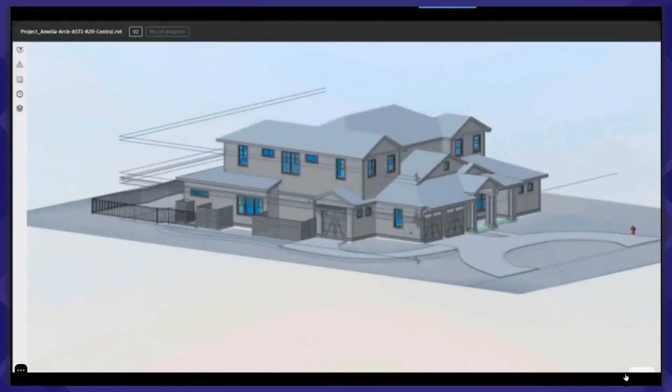So let me go ahead and play this recording. This is Project Amelia, a home in Florida where the homeowner wanted to use a robotic total station to verify layout. The entire home was generated inside of Revit.

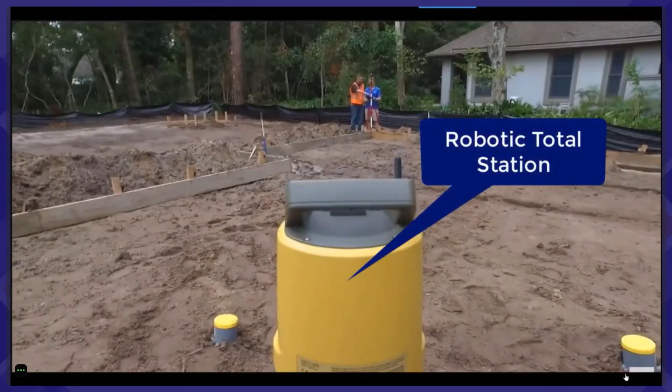And then using the robotic total station, we were able to locate all the underground utilities. It was a good thing we did that, because there were a couple places where the pipe stub-ups and the floor-mounted electrical boxes were not in the correct location. Using the robot, we were able to quickly find those locations.

Now I'm going to jump right back into the video and proceed to here and just stop for a second. So this is the robot. What you see is I'm back here holding an iPad, and that iPad is communicating with the robot. This robot is actually telling us where to stand.

By looking at the iPad, we can walk around to wherever a pipe stub-up might be, or an electrical box. So we're not telling the robot where we want to be, it's telling us where we need to be based on the model that we're using.

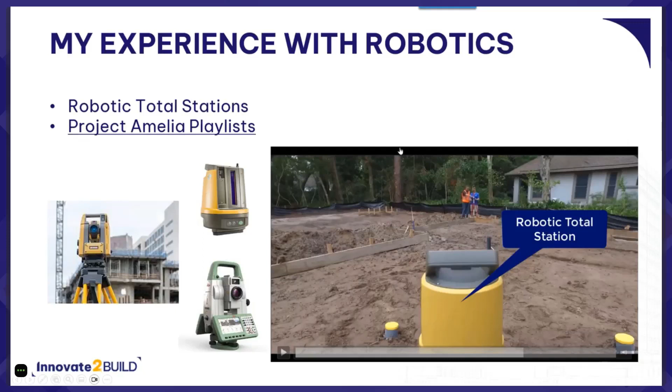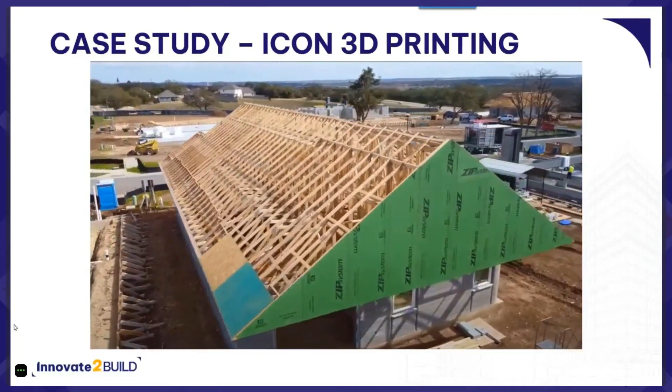Here, it's actually constructing these buildings out of concrete. And once the walls are created, then framers will come in to go ahead and create the roof, install the roof trusses. But here's an example of the actual printer.

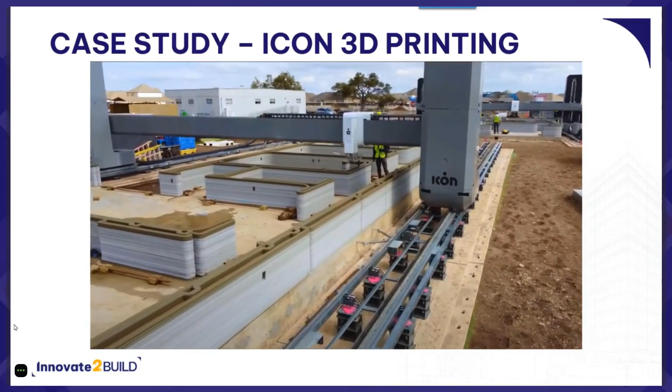And it is going through and actually placing concrete down on top of itself over and over again, and these will actually be the physical walls for this particular building. So those of you that work with concrete a lot, a lot of this can be done differently - we can put rebar in there as well.

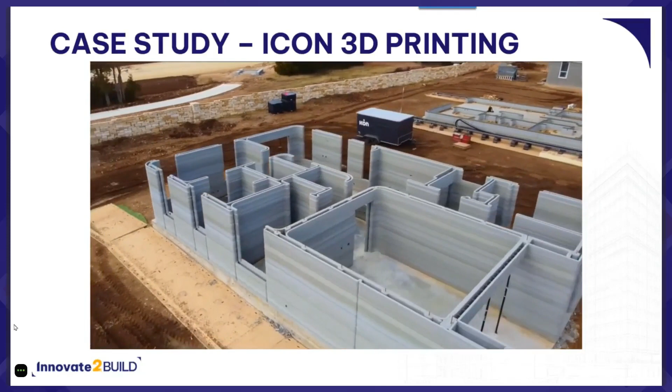But what you're looking at is a 3D printed floor plan taken directly from a three-dimensional BIM file or Revit model, and then from there it's converted into a 3D house.

So first, what is the definition of augmented reality? It's a technology that overlays digital information, such as images, videos, or 3D models, onto the real world, enhancing the user's perception of their environment.

Number two, some advantages with it is spatial awareness. AR devices are spatially aware. They know where they are in a building, and this allows users to interact with and manipulate virtual objects in the context of the physical world. The AR goggles today can sense if there are specific objects around it and then have the ability to overlay the digital with the real without any need of any sort of targets to do that.

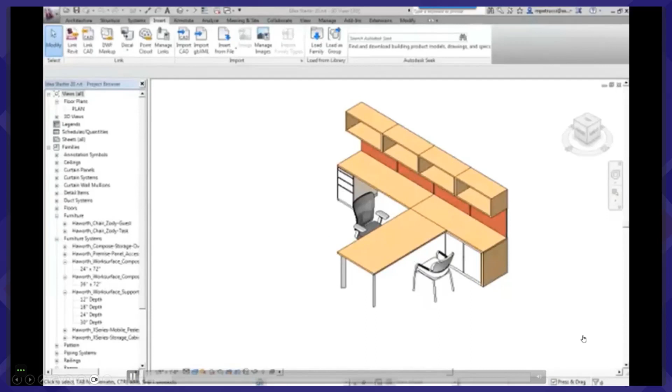I got a video here that's going to show you my first experience with AR. If I remember correctly, this was back in 2012, and this is up on my YouTube channel. In here, I just quickly put in some equipment in a Revit model, and then I pushed the equipment over into a product that Autodesk used to have called Showcase. With Showcase, I put a sheet of paper underneath the furniture, the same paper that you're going to see sitting on my desk in a minute. There's my hand, actually. And this is my very first attempt with AR. And so there's the paper.

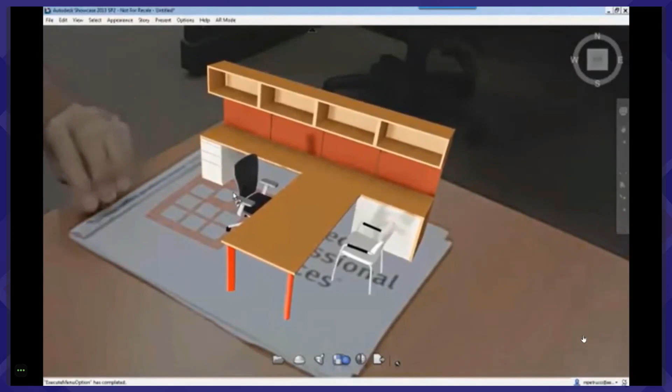Now notice as I move that paper around, I can actually see that model. Now with my naked eyes, I can't see the model. I have to look through it. I have to use a lens. In this case, I was using a webcam, but I could have used an iPad or a set of goggles if they were available back then to view that three-dimensional object. That is augmented reality. I was displaying that furniture on my desk. In a real environment, it'd be much bigger and I would display it on a floor so I could see how things look. But that's an example of AR, digital plus the real world.

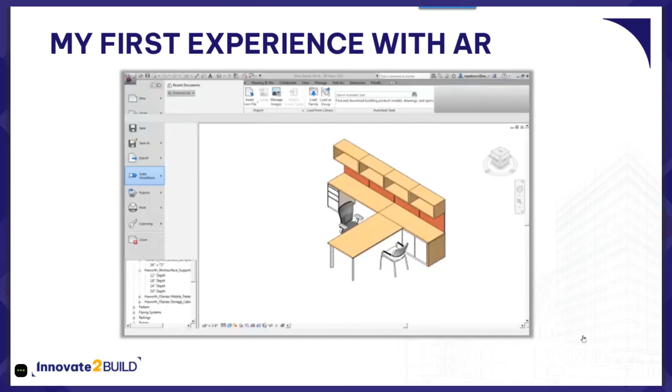You actually can do AR today. You can do it right after this call. Now we can use iPads and iPhones, and we can display 3D models. Like in this example, you can see a model displaying on the desk. Now you need a model to do that, but you have the ability today. If you happen to download the Amazon app, and many other furniture and appliance companies are doing this, they have the ability that when you look at their furniture online, you have the option to display it in your room. You press a button and hold your camera up. This camera will actually show your physical room, and then you can see what that piece of furniture looks like in your room. So you can actually do that today.

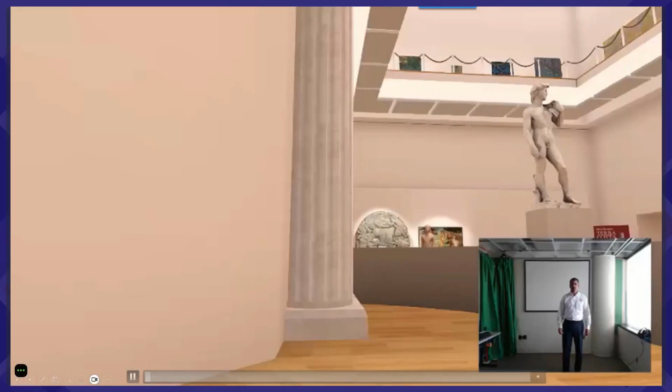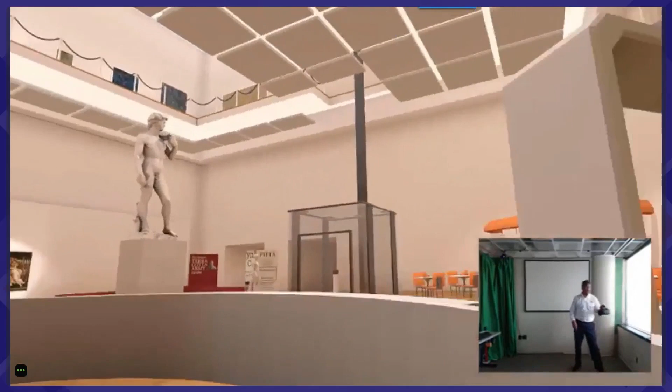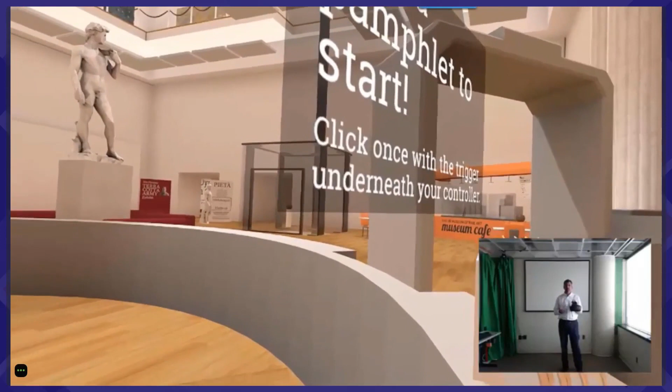I'm actually in a room that we used a lot to simulate AR and VR, and you'll see the green screens in the back. I'm pointing to the upper corners where those little boxes are. Notice when I pick up the headset, how the screen shows what I see when I put it on. As it's shaking in my hand, you can see the screen is also shaking.

As I put it down, I'm going to pick up a device I hold in my hand, and that gives me the ability to walk through the building. I can pick up any item, and I also have the ability to jump to other parts of the building.

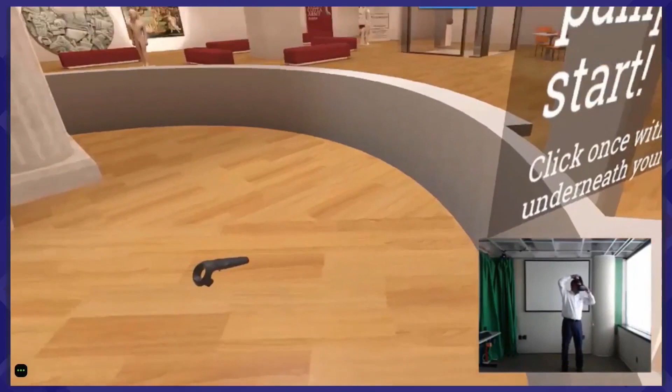So here I am putting on the headset, and obviously this building is much bigger than the room I'm in. At some point you'll see me jumping—you'll see a little light on the ground, and I'm controlling where I could jump to within this particular building.

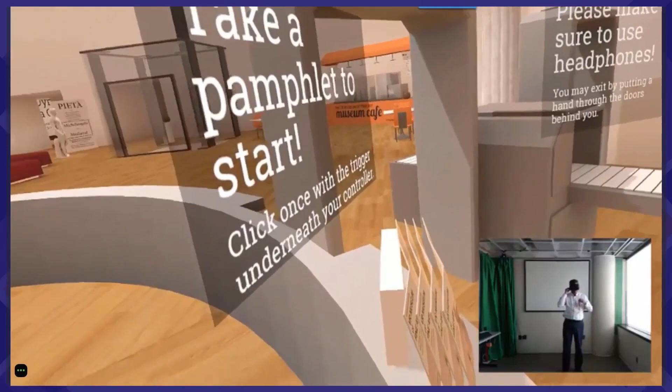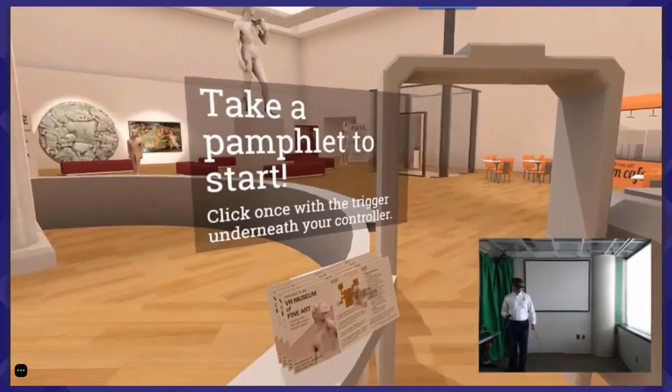So I'll go over and pick up my handset. Now I'll walk around and I'll see there's a little pamphlet here. Using my headset or my hand, I pick up that item, go ahead and read it, and then put it back.

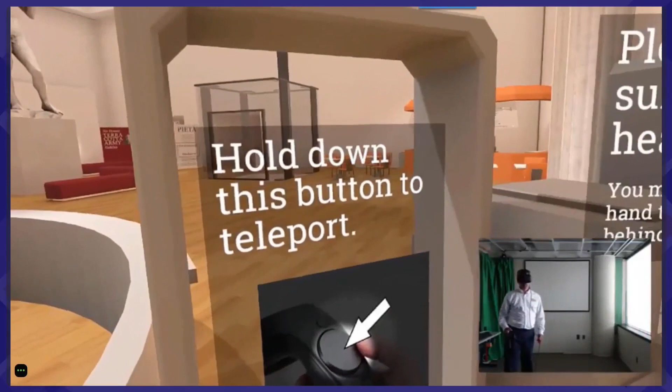Then you'll see me walk through. Notice as I walk towards the camera, I know to stop because in my headset, which you don't see, I see a grid that pops up to let me know I'm very close to something in the real room. Now you can see I'm just jumping around looking at the exhibit.

Here's something I can do that I can't do in the real world—I can actually jump down into the exhibit. You can see me turn around and look, and I decide I'm going to walk around and take a look at this particular exhibit.

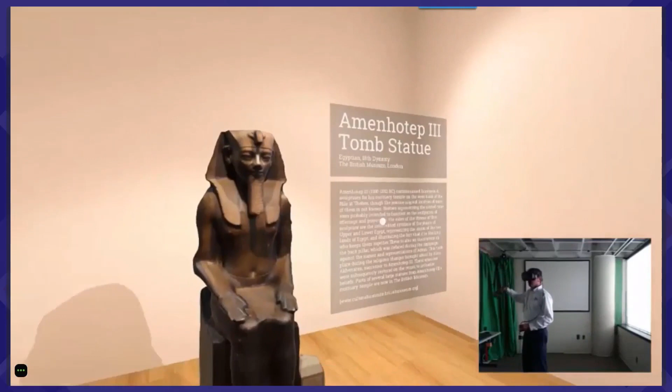This is very easy, very fluid for me. Like I said, I never worry about walking into something because the unit will display a blue grid in front of me to let me know, hey, don't walk any further.

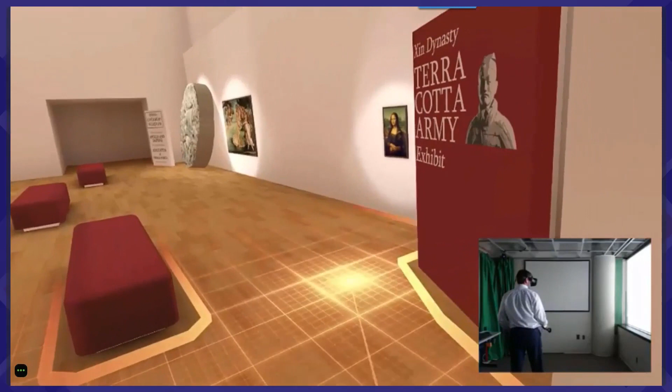And you'll see as I continue to move around, I'll even walk up to this painting of the Mona Lisa. Depending on the program, here I can see some brush strokes, and you can see some of the cracking related to the painting. So here I am just looking around.

There's an elevator in here. I could actually take the elevator up to a floor. In this scene, what you're looking at is me using a different program. This program actually allows me to jump ahead, and it shows a person.

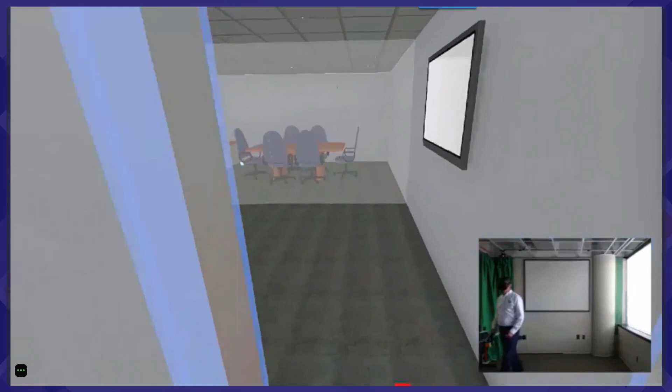Here I'm actually walking into my office. This is my actual building. And I walk down the hall here to my left—this is my actual conference room. That's exactly how we have our tables laid out.

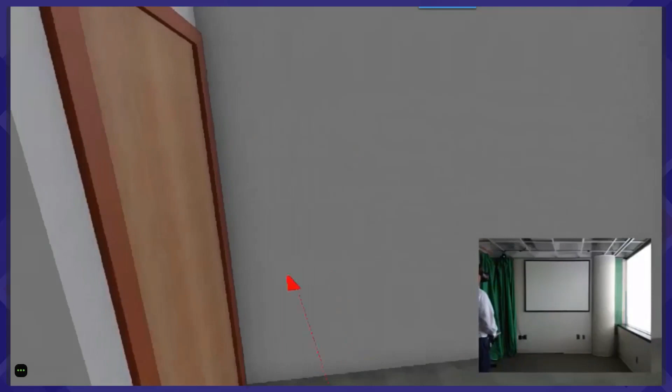So before we even constructed this space, we decided to design this here using VR. Took some measurements, which you saw up there at the top. And I'm going to jump ahead a little bit in this video.

And here, this is my break area. It's exactly how it looks in the real world, but I'm 100% in the virtual world. And here I'm just going to jump ahead to different parts of the building.

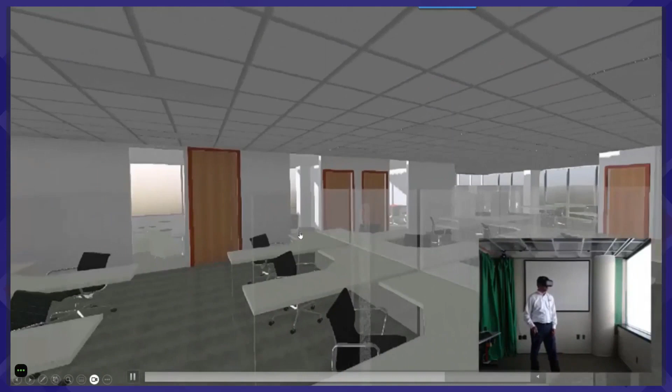Now we set this up so that the cubicles had transparent walls so we can see a little bit better. But I'll show you one more place in here. That office right there—notice I click on the door, it opened. This actually was the owner's office. And I'll walk back out here into the space.

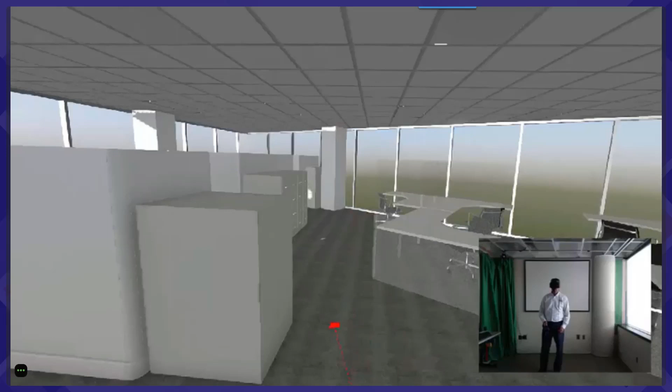And finally, you'll notice right over here in the right corner, that was my office. That's actually where I am today, but this was done maybe 4 or 5 years ago. So we were able to look at the space before construction started, design it and see what it looked like and how we felt about it before construction ever began. So that's my experience with VR.

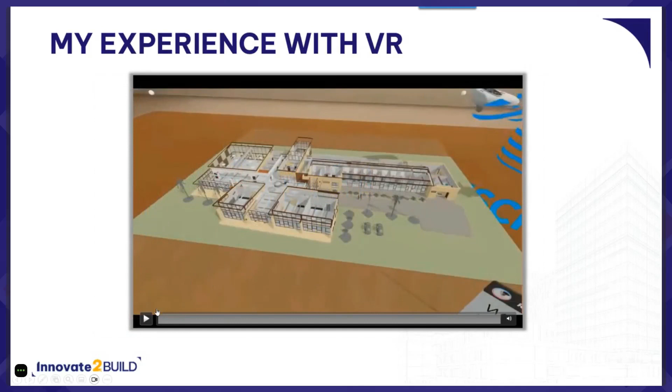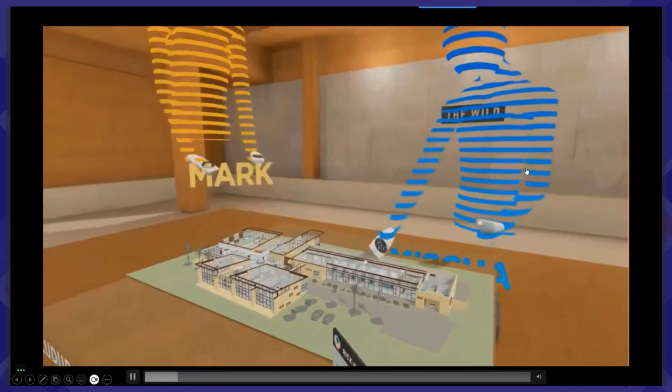Here's another personal experience I have with VR, and this one really kind of blew my mind when we started doing this. Here is me, notice my name, that's me right there on that side of the building. To the right of me is Mischa, and the camera point of view is Rick. The three of us were actually in this virtual environment together, and we're all looking at this building that we constructed.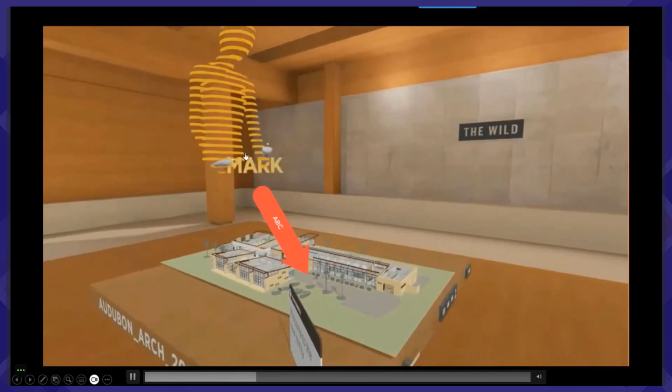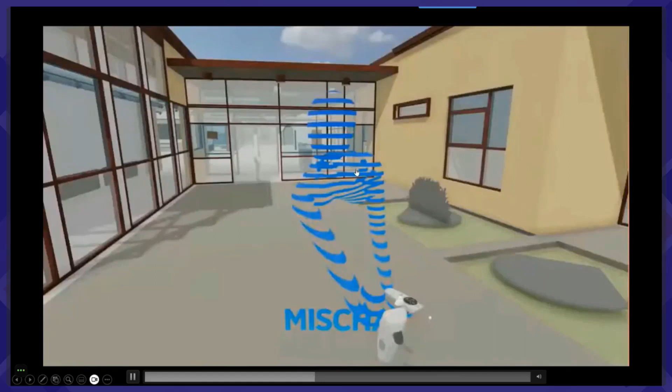Now, what you'll see here in a minute is a little arrow that points. Mischa is going to put himself right into the environment, and me too, you'll see I'll disappear. All of a sudden I'm going to show up standing on the sidewalk. As Rick starts to look around, you can see, and I'll bring up the arrow again, here's Mischa and I standing there. Now Rick teleported himself into here.

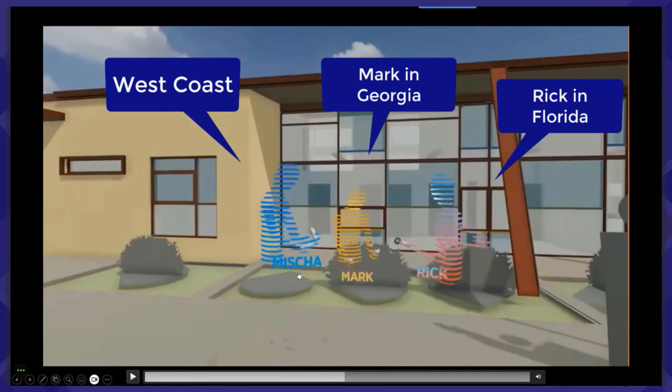Now you're going to see the three of us, and we are all actually in different parts of the country. Mischa's on the West Coast, I'm in Georgia, Rick is in Florida. This is simulating our bodies. We can each hear each other talking, our headsets have speakers as well as microphones so we can talk to each other. When our hands move, our arms move, our head moves in real life, it also moves here in the virtual world. Now you'll see a couple of us are looking down right now, and that's because we just happen to be looking down at a screen.

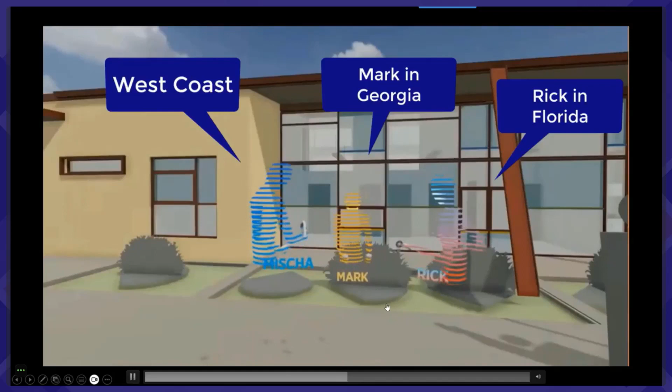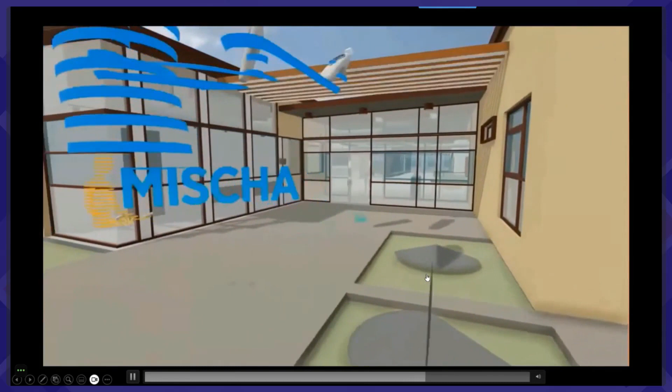But we'll raise our head, and at some point Rick will ask Mischa to make some design changes. So you'll see Mischa disappear in a second, and then he's going to get bigger, he's going to look like a giant. To the left here, you're going to see Mischa create some trellises right over here. Notice he's laying out some wood beams, and notice the devices in his hands for him to lay out those beams. Well, if he's putting out some beams there, maybe he'll put in some columns.

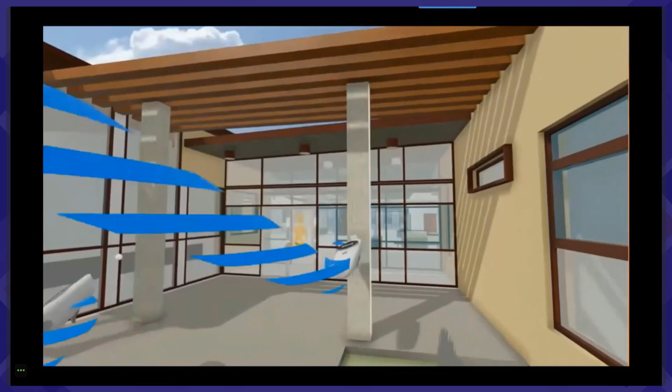So he made himself small again. I happen to be standing underneath so I can see what it looks like from my point of view. Mischa is now putting in a couple columns in here, and very quickly he's able to put in 2, 3 columns and lay them out. With me standing right there, I can give him input about what I like and don't like. So that is the collaboration that I was talking about in a previous slide.

Okay, now let's talk about artificial intelligence. Let's get into it. We've been hearing about AI for quite a long time, all right? And the way Autodesk defines it is the theory and development of computer systems able to perform tasks that normally require human intelligence, and in some cases can surpass it.

So you've probably heard of AI all over the news, and probably the more common one you may have heard of is ChatGPT. It's said to be the fastest growing application of all time. I have actually used ChatGPT. When I write long letters or documents, I will put it in ChatGPT and ask it to review it, check the grammar, and it will come back and rewrite it for me. Still my own writing, but it'll rephrase a couple sentences or replace some words I have missing, and it saves me a great amount of time. So I use ChatGPT when I want to make sure that whatever I write sounds professional.

All right, so we know it has enormous potential. So let's actually take a look at some of that. I'm going to just jump ahead to these examples.

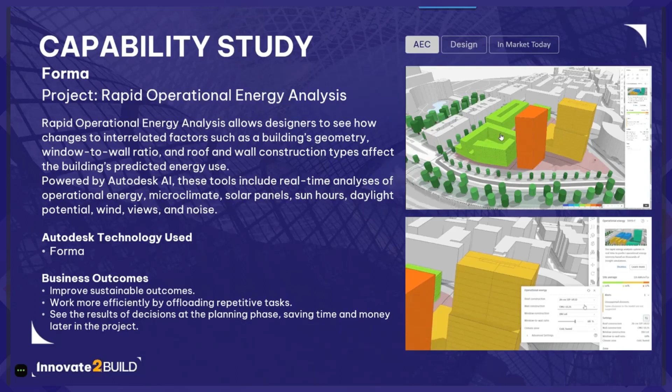Forma. This is a big deal. The project was the Rapid Operational Energy Analysis. On the right-hand side, what you're looking at, AI took the space that was available and it started coming up with different scenarios for buildings. And not only was it trying to fit in the buildings, it's also trying to fit in the parking. And it's also running different analysis, determining the window to wall ratio, the roof and the wall construction. It's also determining the energy that the building would require. So it's doing all this very, very quickly.

Within Autodesk Build, as we take photos, it will automatically tag the photos. So later I could search and say, show me all the photos that have people in them. In fact, what's interesting about people, I took some photos that I didn't know there were people in the photo. They were just kind of off to the side.

One was partially behind the wall. And when I looked at the tags, it said things like concrete, walls, columns, people. And I thought, where are people? And sure enough, there was just part of people showing up in different parts of the photo. But then it allows us to filter out the photos and find specific photos. So I can find all the photos that have specific tags in them.

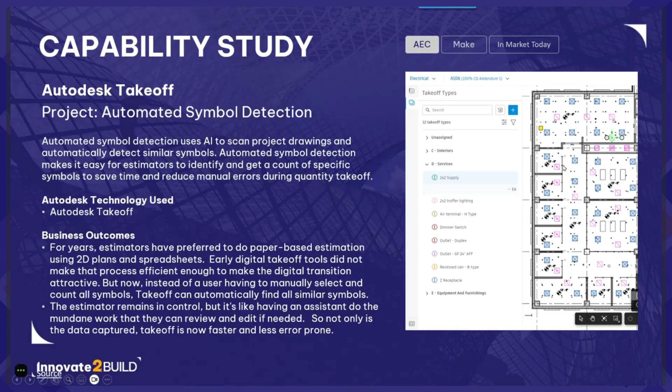So real quick there, guys, each one of these comments, we could have spent an entire hour on just one of the items, whether it was about robots, AI, AR, VR, but hopefully I kind of gave you an overview to let you know the potential that is out there. And feel free, if you have any questions, I'll be happy to answer them either by email or live during our session. Thank you.